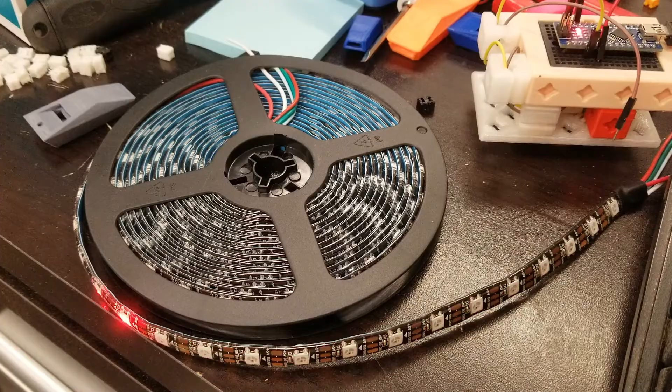And I thought this time I was going to use these individually addressable LEDs. These are one of the most amazing innovations that the electronics revolution has created. Just think about what goes into each one of these. All you need is power, ground, and one line of data going in, which means every single one receives the data for all of them all the way down the line. It takes out the part that it needs and passes it on. There's a timing chip in here. There's logic circuits. These things are absolutely amazing, and you can buy a whole spool of 300 of them for 30 bucks. We are totally living in the future.

But most of the time when I see these being used, they're kind of underutilized. People throw up a line of these and then just turn them all on to bright white and just use them to illuminate a scene. Okay, yeah, you can do that, but if you're just going to make them all be the same thing, just wire up some LEDs in parallel with each other. Why use something as intensive as this?

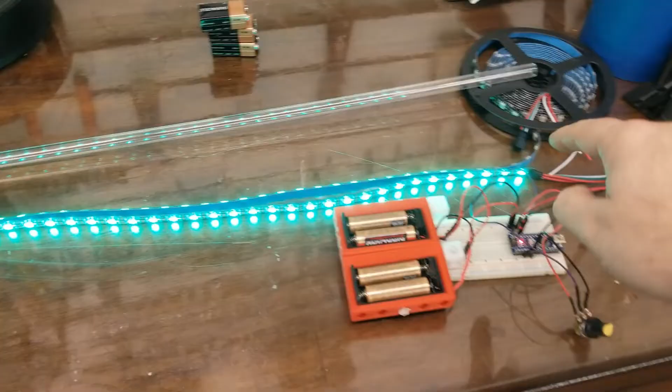So I wanted for my project something that could utilize the full range of what these LEDs can do. Not only could you change the color of the blade to match what side of the force you want to be on, but we could also have modes that are colorful and moving and changing all the time. So that was the idea going into here.

An LED lightsaber that would, of course, be powered on its own, but have an input device, in this case a little potentiometer, that would read the position of that potentiometer and respond by coming up with different modes that you can switch between just for fun, some of which could even be animated.

Christmas, anybody? But one last detail that I had to figure out before I could get started was, what shape would the hilt be? I knew it was going to be a lightsaber, but I didn't want it to be just like any old Star Wars lightsaber. When I did my mini lightsaber, I made the handle look like a sonic screwdriver, and I wanted to do something a little bit like that with this one.

Now, the thing about brainstorming is it's always best to do it with as many brains as possible. So talk to other people about your project and maybe they'll come up with a great idea. And sure enough, my wife, when I expressed my idea of what I wanted to do in this project, she started thinking about cool swords and said, could you do the sword from Princess Bride? Oh, yes, that's the winner.

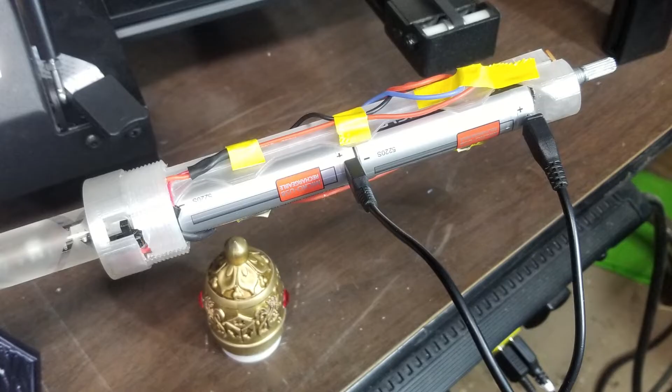Fortunately, I have a local battery shop, and when I went there and said, hey, do you got these rechargeable batteries everybody's talking about? They said, yes, kind of. We have this different kind that actually has a USB port on it so you can charge it without needing an external charger. And I went, sold.

So I had the batteries, I had the Arduino, I had the start of the code I was going to use, and it was responding to the twist of the potentiometer. So it was looking good.

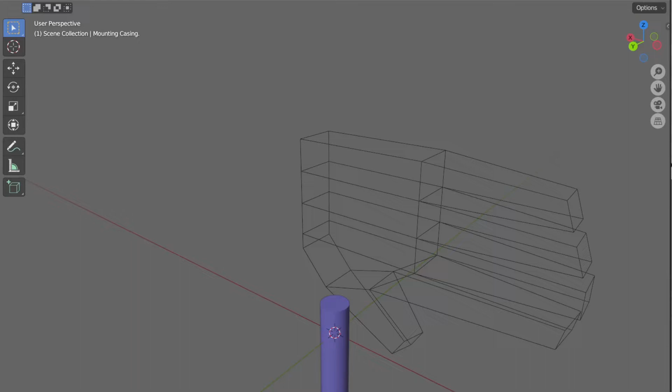Now I needed to start modeling something that would hold all of these together in place. This goes out to everybody who thinks Blender can't be used for real-life projects. I was completely capable of modeling this in Blender, making 3D representations to the exact dimensions of the components I was building.

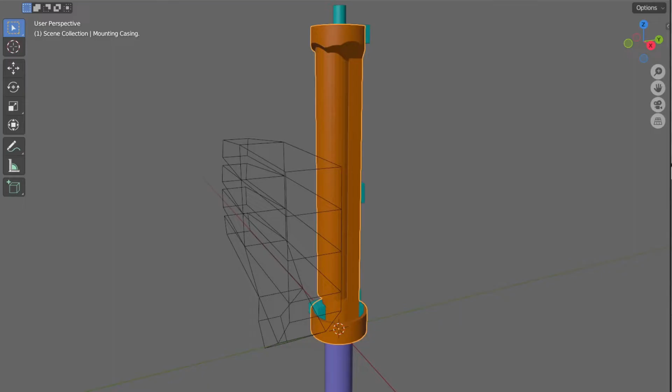I built a handle around them that would hold them all into place, and I even 3D printed the threads on it so that we could take our handles and screw it on there when we're done and hold it in place.

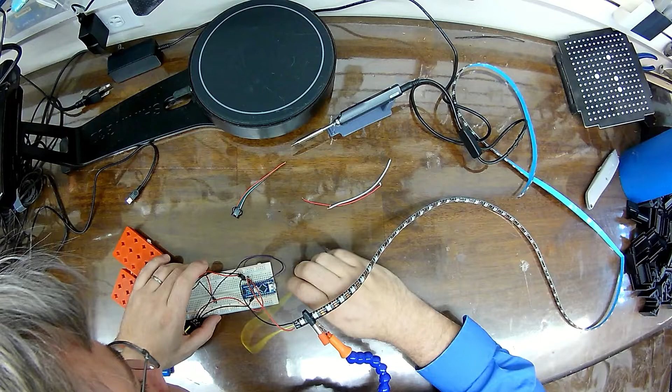But then I ran into my next hurdle, because once I had the electronics together and the LED strip ready to go, I put my LED strip into the acrylic tube I had and discovered that acrylic tube was too small.

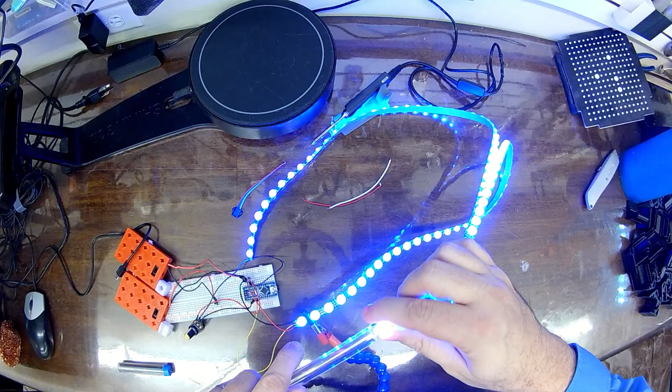Some idiot didn't pay attention to the fact that 3/8 of an inch is smaller than 10 millimeters.

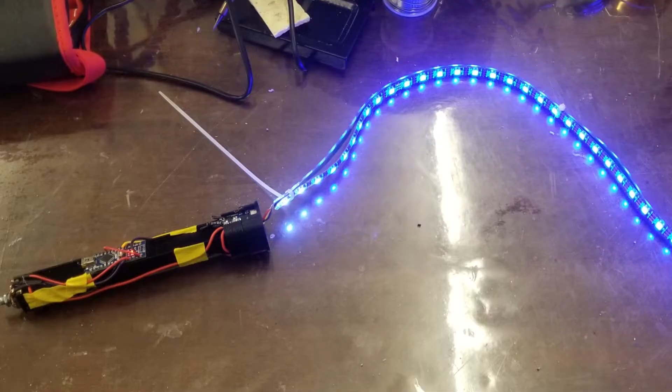Of course, this is the week leading up to Christmas, and during December I try not to order things online, which means I was going to have to wait till January to get the part I needed, which means my 10-day build was not going to be finished in 10 days.

I had proved the concept, I had the basic code in place, and I was ready to go, but unfortunately I was going to have to wait to get the delivery so I could get this going the way I wanted to.

Then there was the problem that the acrylic tube I got was transparent. I needed something that would diffuse the light a little bit, and I wasn't sure what I was going to do. I experimented with the too-small tube I had, seeing if I could just get some sandpaper and buff it up that way, and that worked, but it was going to take a lot of time.

Man, it sure would be nice if I had a sandblaster. So I asked around, and I found a friend nearby who had a sandblaster and was able to do this, but I wanted to make this fancy.

So I took electrical tape and masked off the blade so that when he sandblasted it, there would be a pattern in the blade. In the end, it turned out really cool after he sandblasted it, although the individual LEDs are still visible through it, and really I wish I had something more diffuse. This will work for now.

Obviously, it's what I've got, but already I'm thinking about, man, if I did this again, I would do it a little bit differently. And then there was the 3D modeling of the handle.

Like I said, I made it so that it would screw on. Technically, I could put any handle that I wanted on this, but I wanted this to look like the six-fingered blade from The Princess Bride. Fortunately, there's a lot of reference images online of, if not the original, very close reproductions.

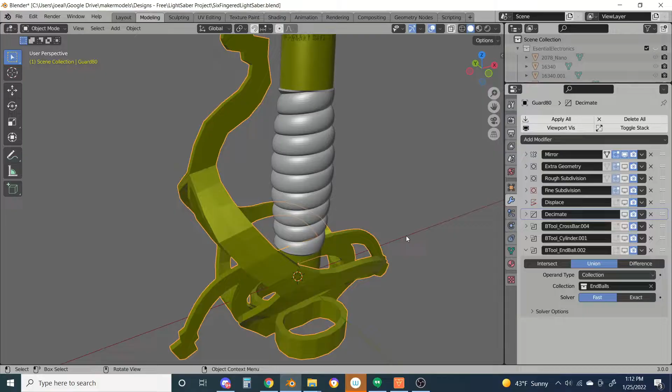I used some, if I can say myself, some very clever techniques. The guard itself is just modeled very roughly, and then I use modifiers to smooth it out and make it look the right way. Then I used more modifiers to give it extra geometry so that I could displace it according to an image that I had made that I had mapped on the outside of here.

I gotta say, I'm kind of proud of how well this turned out. But what would be the best way to 3D print it?

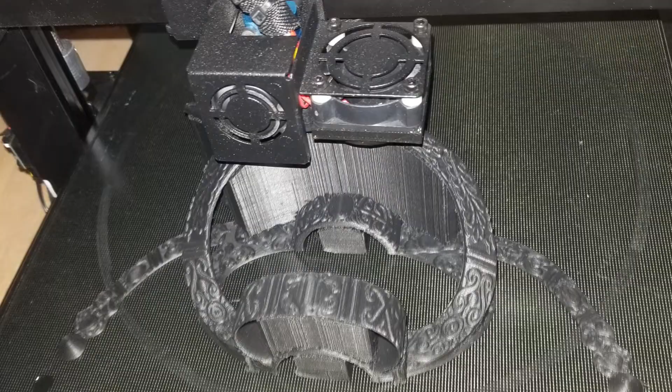At first I thought I could split it in half, lay it down. It would be a fairly short print. I would just have to put supports underneath all of these parts. But these parts were never meant to be seen—they're always supposed to be away from the viewer.

So no big deal, except that on this side over here we had supports above and below, and in the removing of those supports, it broke. So this became another test piece for me to play with. In the end, I decided as long as these balls were touching the build plate, and I was careful about making them adhere well, I could just print this standing up.

Sure, there'd be a little bit of overhang here to deal with and supports underneath there, but for the most part, this would probably print pretty well standing up.

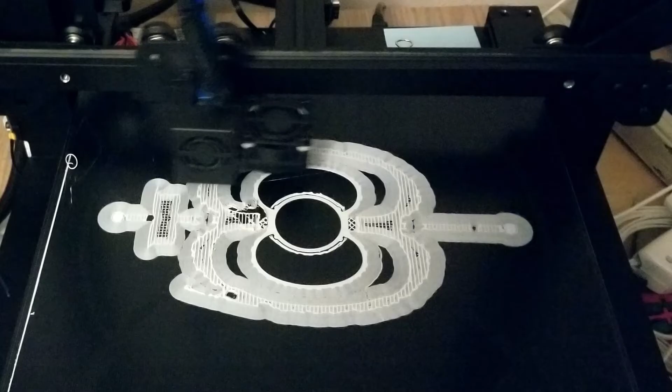Now, this was a print that I was going to test out the Longer LK5 on, and the first print didn't exactly succeed, but I blame the fact that the balls on the end just weren't very stuck to the build plate. So I ran another one with more bed adhesion, and that one worked good.

But it was a three-day print, a nerve-wracking three-day print where the whole time I was watching this 3D printer, wondering could the Longer LK5 pull it off? Every day I'd come in and look, and every day it was just chugging along layer by layer, until at the end of 3.5 days of printing, it succeeded.

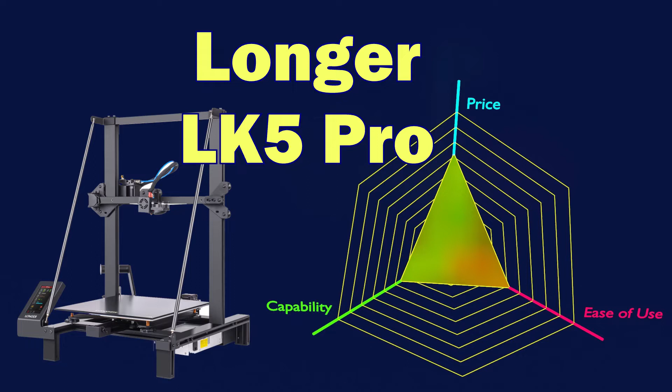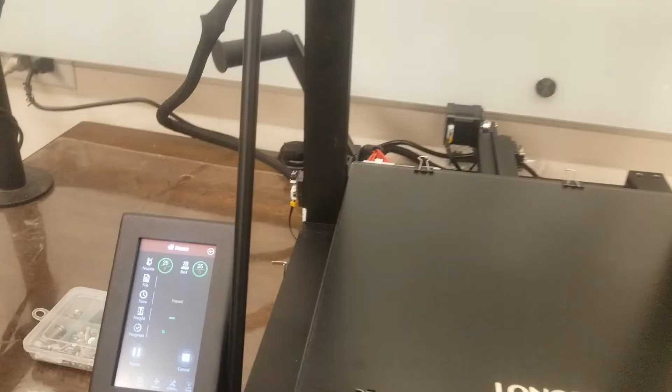Now, talking about the Longer LK5, it's an affordable, large format 3D printer without a whole lot of bells and whistles. Although one of the coolest things about it, the user interface is, well, it's kind of familiar—it looks a lot like the user interface on a Raise3D printer. However, it's not the user interface on a Raise.

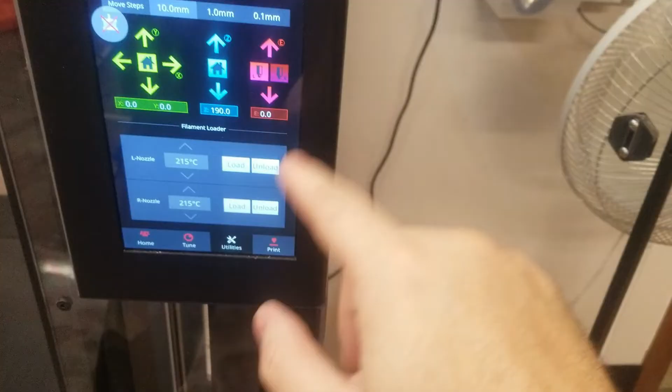The Raise 3D printer's user interface runs on Windows. This definitely does not, but they were definitely cribbing notes from the Raise 3D printer, and for whatever reason, them looking at a superior user interface and going, I want to copy what it does, created a pretty decent user interface on the Longer LK5 Pro. However, whenever you have a 3D printer of this price, there's going to be a lot of things about it that you're not gonna like as well.

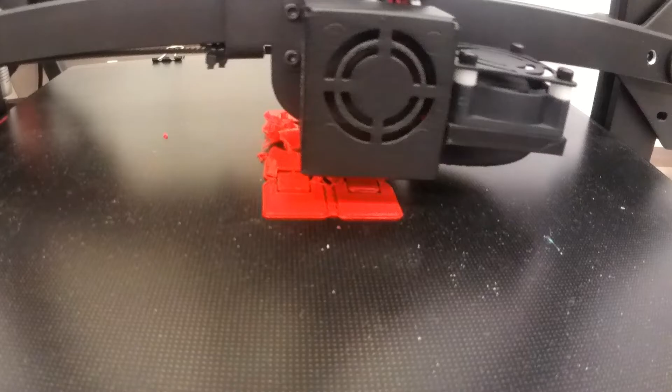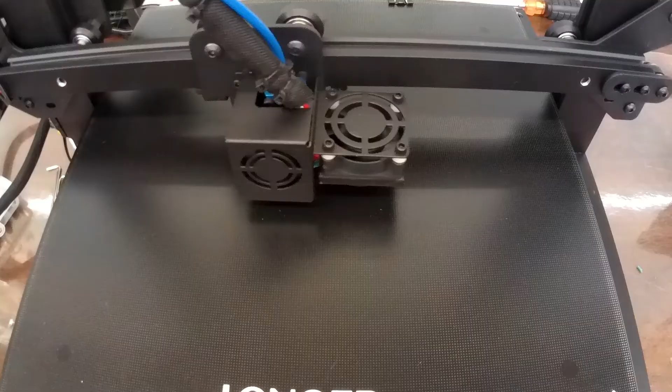For sure, there's a lot of things about this 3D printer that I wish were better. This build plate, I couldn't get anything to stick to it until I absolutely doused it with hairspray. Also, the SD card is kind of hiding away in the back under the filament in the shadows. It's really hard to get at, and I was able to get an extension and move that out so that I could access the SD card in front. That helped a lot. In fact, overall, I would say any major problem that you have with this 3D printer can be upgraded away, but it's kind of frustrating that those upgrades are necessary in the first place.

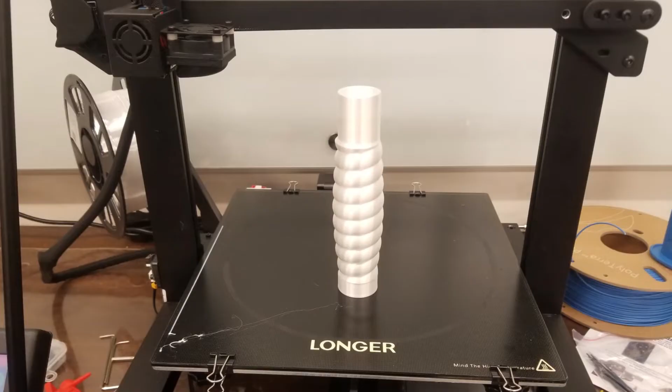Still, I can't deny that, especially on this project where every part that was 3D printed was 3D printed on the LK5 Pro, it succeeded brilliantly. It did a great job.

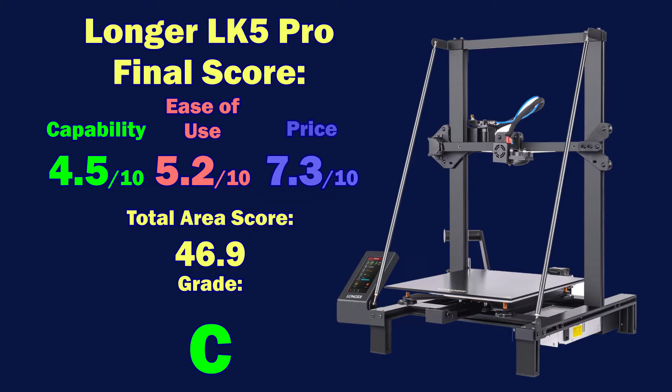I used a variety of materials in this project. The electronics holder together thing was printed in PETG. The main part of the handle was printed in silk PLA, and the guard was printed in Polyterra white PLA, or black PLA when I was experimenting with it.

And I gotta say, I really do like this Polyterra stuff. It comes on a cardboard roll, which just makes me feel good, and it's good filament. It prints well. Normally, I don't recommend being loyal to one brand of PLA - one brand is the same as another - but if you're gonna be loyal to a brand, I'm really thinking Polymaker is the one to go for, because they make good stuff and they're just conscientious.

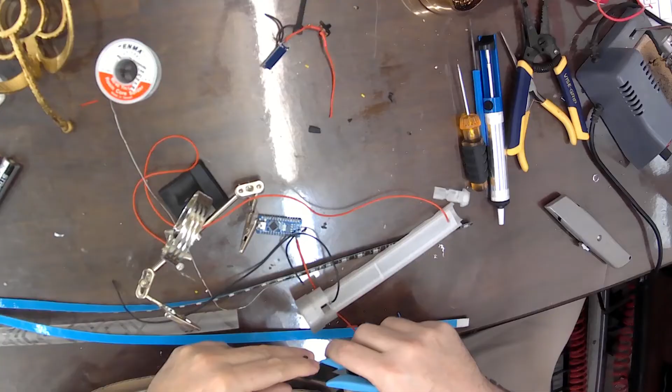I like it. So finally, I've got the right tube, I've got all the parts printed, I've got the code written for it, and I'm ready to put it all together.

I 3D printed an end cap that has just a little bit of a peg on it that I could wrap the LEDs around with some fishing wire so that it won't fall down as I'm swinging it around and doing cool stuff with it.

Put it all together, turned it on for the first time, and it worked, and it is so cool. Now, I discovered early on that I needed to have a stand for it because as cool looking as this handle is, it is a little bit fragile, and I've already had to super glue it like 3 times.

Another couple of finishing touches though, and things that I had to experiment with - I had heard that if you use shoe polish on gold paint like this, it makes it look weathered and old, and I could see that. A sword like this that you have for years, you try to clean it and keep it good, but you just can't get into those deep crevices, and it just makes the pattern on here pop.

So which shoe polish to use? Black is the common choice, but they also make brown shoe polish. Well, I got them both, and I used one of the extra 3D prints that I experimented with. I actually used a lot of failed prints for experiments to try different finishes, to see what I needed to do. I found a little bit of clear coat made the lines a little bit gone and made things a little bit smoother, and then putting the gold on top of it worked.

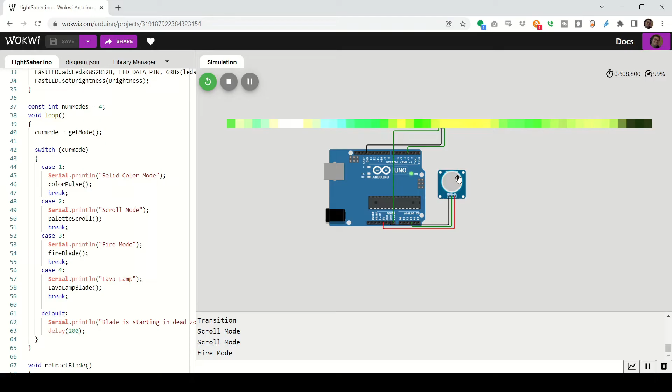And if you want to jump on there and write a function that will do cool things with 50 LEDs, I will take that function, add it to the code for this lightsaber, and maybe in the future we'll have a video where I run your code on my lightsaber.

I think that there's still a lot that could be done with this straight line of 50 LEDs, and if you have any idea and you want to see it on my lightsaber, well, jump on to the link in the description. I'll also have a link in the comment section that will go back to my blog with more information. And I would love to see what you guys come up with, because I know that you are bright and clever, and I know that you guys can come up with some really, really cool things that I can't wait to see on this blade.